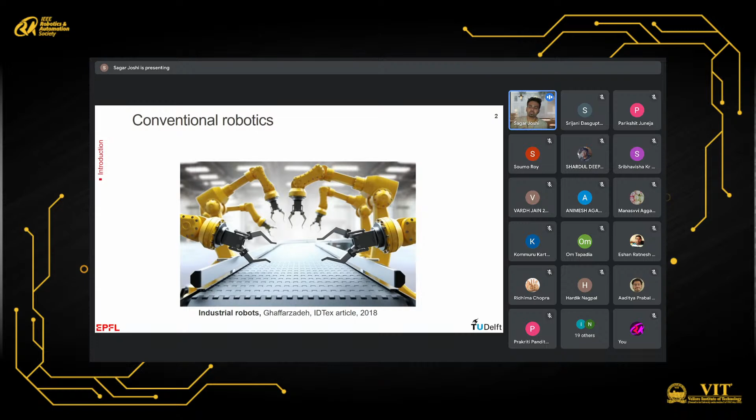So just a brief introduction. Wearable robots are robots that you can wear. They are directly attached on the body to assist or augment the function of the body. But why do we need these kinds of robots? You can have workers in industries who have to work a lot with manual material labor, like lifting things, lifting tools and operating tools and so on. For those people, you can have devices that you can wear, which can take off some of the load of the muscles of the body.

Similarly, for people who have lost some of their physical abilities, you could use these to restore some of the functions and help them in activities of daily living, which is ADL. You could also use these kinds of robots for sports training. Some of you might be aware of resistance training, where you try to put more weights on yourself while doing a particular activity. Or you could just be curious about how the body works, and see what happens to the movement and the human motor control if we apply external forces on the body.

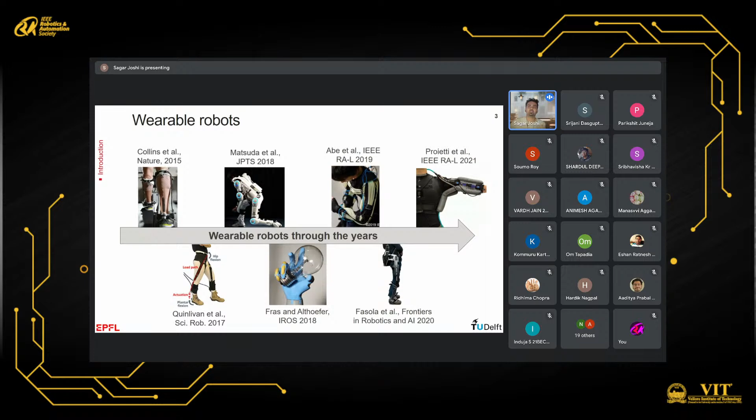So now, over the years, there have been several different kinds of robots that have been built that have been placed on different parts of the body to assist different parts. They can be briefly categorized into two main categories.

One is known as rigid exoskeletons, or exoskeletons, where exo means external and skeleton means a skeleton. The main idea is that these consist of a traditional robotic body with a rigid structure, which has rigid links connected at well-defined joints. The advantage of these kinds of devices is that we already know a lot about how to build these systems, how to operate them, how to model them and so on.

The problem, however, lies in the fact that the joints of the body are not perfectly rotational joints. If you look at the motion of, let's say, the ankle or the knee or even the wrist, the elbow, and so on, it doesn't always move perfectly across one single axis of rotation. It's always accompanied by some kind of translation and rotation at the same time. Plus, you have motion of the skin, and so on.

And so there is some kind of incompatibility between the motion of the robot and the motion of the human. This leads to additional forces that act on the body, and that can cause some kind of discomfort or even pain. Secondly, since these robots require a rigid frame, they're usually large, heavy, and bulky, and also, of course, costly.

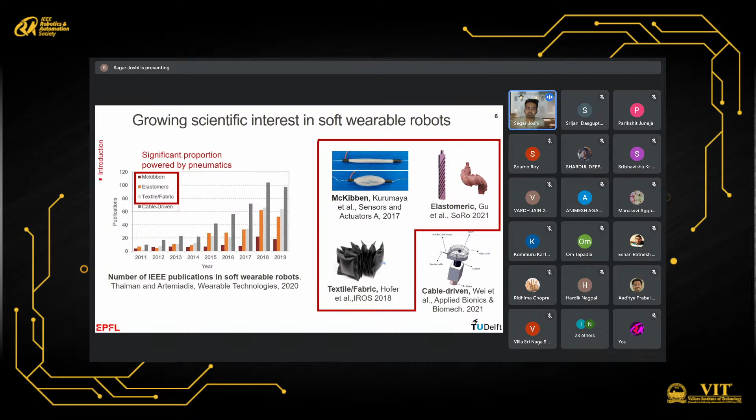So just to give a brief idea of what pneumatically powered soft robots mean, it's systems like this. The general idea is that these robots are kind of hollow structures with some kind of mechanical intelligence built into their design. So when you inflate them, they inflate in certain specific directions and certain specific ways to create some kind of motion, and that can be pre-programmed into the design of the device.

Just to give a brief summary, pneumatic supply systems consist of a source which generates the pressurized gas. They consist of valves that control how the pressurized gas is sent to the actuators, or how the actuators can be inflated or deflated and so on. And then the pneumatic lines which connect the different components.

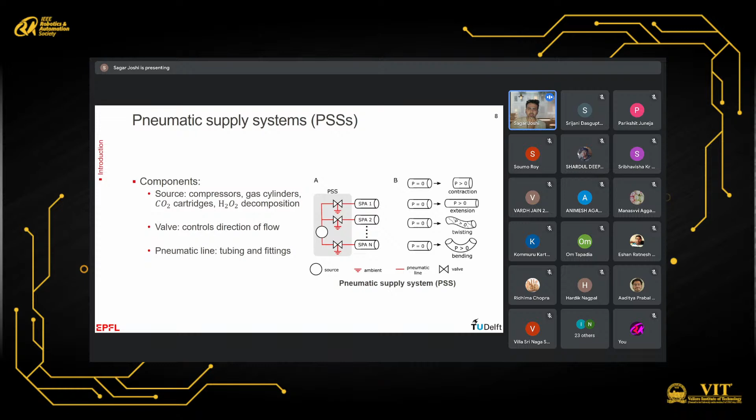Then because air by itself is compressible, you have some kind of inherent compliance. So it's not like a rigid robot which will move to an angle and then be very rigid at that point. Because of the compressibility of the air, you can still move the actuator and it won't force the person to stay at a specific position.

Additionally, since these are by nature expanding type actuators, the forces that they apply on the body are generally normal to the skin. Now, this is a very commonly observed challenge in wearable robots in general, that the forces that are applied on the skin, if they act shear to the skin, like if they act tangential to the skin, it causes a lot of discomfort. Whereas if it acts normal to the skin, comparatively, that is much more bearable. So, by nature of soft pneumatic actuators, these produce normal type forces on the body.

The next step that we have to think is that, okay, we have these soft actuators which are good for several reasons. We can build wearable robots with them, but that's not the only thing. There's a lot of things that we have to think through in between. We need to think about how the soft actuators will behave. So what will be their dynamic performance? How will they move? How will the different forces be applied? As well as the core supporting systems, mainly the power, sensing, and control.

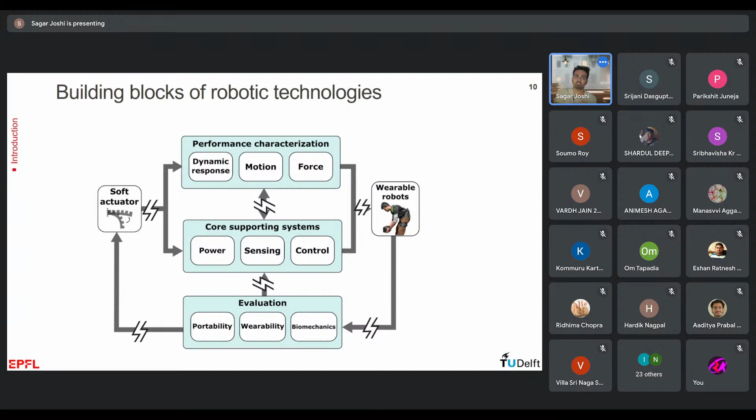When I began my PhD, there were significant research gaps in all of them. So the objective of my PhD was to try to understand the link between these different blocks, and develop a more core understanding of how soft actuators work and how they can be used for wearable robots. So among that, today I will talk about modeling the dynamic behavior of soft pneumatic actuators, and then how soft wearable robots affect the user.

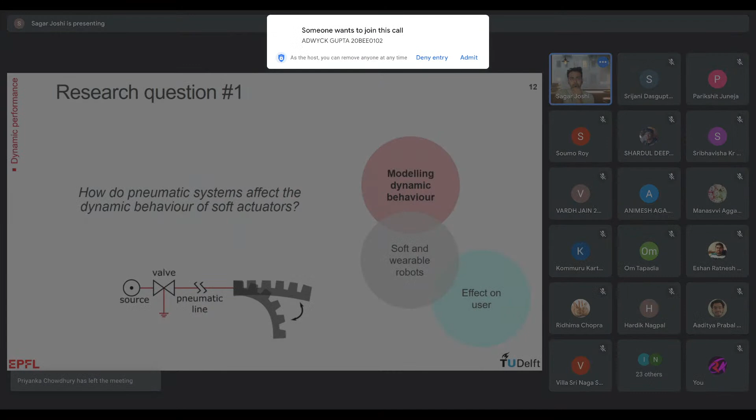So generally, when we are thinking about a research problem, you have to come up with a research question. So the first research question for the first problem is, how do pneumatic systems affect the dynamic behavior of soft actuators? So, like I had mentioned before, pneumatic supply systems consist of source, valve, pneumatic lines. And the dynamic response of an actuator is governed by these three factors.

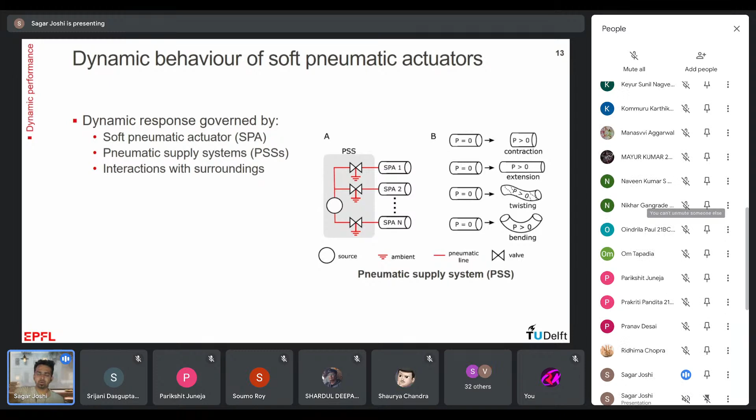Now, just to clarify this a bit more, let's say you're wearing an assistive glove and you want to reach out and pick up a glass on the table. You need to move your hand there, and then you need to power the actuator, and then the actuator needs to close the grasp within a certain amount of time. You can't have it moving very slowly for, let's say, 5 or 10 seconds. So the idea here is that generally the requirements of speed are specified for a given application. And so you need to somehow control your system so as to meet that speed.

But previous studies that worked with soft pneumatic actuators in general did not know what is the link between the pneumatic system that you have and the kind of dynamic performance that you get. Dynamic means how fast you can move the actuators. So to address this, during my PhD, I worked on a generalized model for the pneumatic supply system, in which I tried to model these different components of a source, the valve, the pneumatic line, reservoirs, and so on.

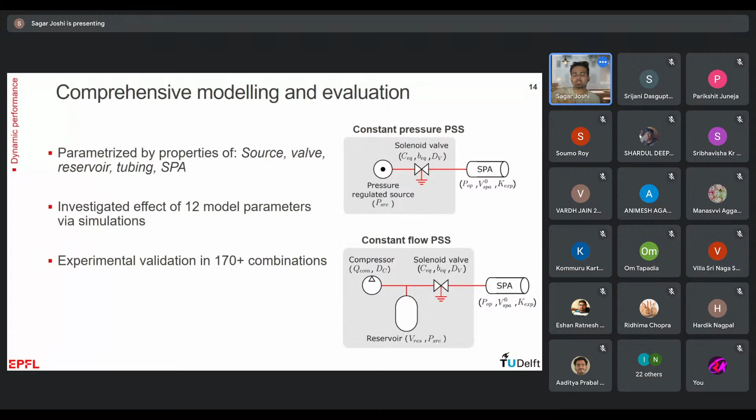At the end, the model had over 12 different parameters, and I tried to investigate how these 12 parameters affect the dynamic response. And then after simulations, I tested my simulation results experimentally using over 170 different combinations of different parameter values. So just to say as an example, actually the next slide would be helpful.

All right, so here you have a soft bending type actuator, and in the four figures you see that it is moving at different speeds. It's moving at different speeds because it's being powered by different source pressures. Now, the important thing to note here is that the actuator is always powered from 0 to 50 kilopascals.

So even though the source pressure here is almost 200 kilopascals, here the source pressure is 400 kilopascals. If you power the actuator at this value, the actuator will burst because it can't take more than say 60 or 70. So you have to make sure to power it so that the actuator pressure goes from 0 to 50 and then switch it off right away.

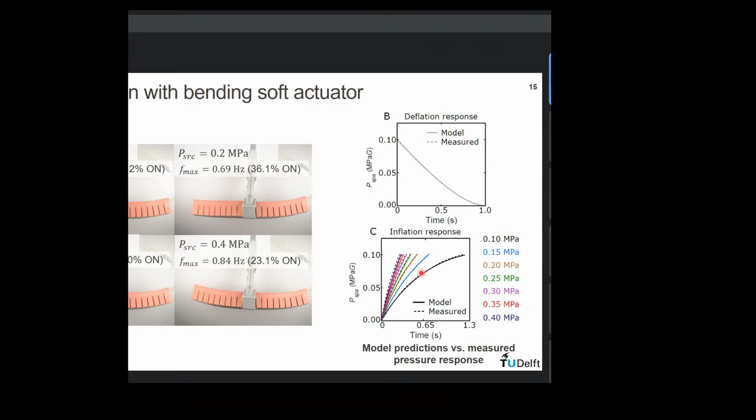But in all these four cases, the actuator is being powered at the same pressure level, but you see different speeds because the source pressure is at a much higher value in this one as compared to this one. And the two figures on the right, you can see the comparison between the prediction from the model and the actual measured data. It was pressurized from 0 to 100 kilopascals. Sorry, my bad. Anyway, so from here the dotted line was the measured, and the continuous line was from the model, and you can see that the model matches experimental results really well.

So what does this mean? It means that you can use this model to predict how the actuator will behave, how fast it will move, in what pattern it will move, based on my model and based on the parameters. So now you kind of have a link between pneumatic system and soft actuator performance. What you can do now is go in the inverse way and then use this relationship to optimize pneumatic systems.

So previously, what used to happen is that to design pneumatic systems, people used to just select some compressor, select some valve, some reservoir value, or some source pressure, and so on. And so it was very heuristic. It's like you do it from experience, or you do it by trying several times, and then you somewhat find something that works for you. But it was not really optimized for anything.

Furthermore, if you change the actuator, if you change your valve, or if you change any other component, you require to retune the whole model, or you need to retune some other components to make sure that you get the kind of performance that you need. But now, by using my model and the simulations, you can optimize the pneumatic system to meet exactly the kind of requirements that you specify. And this can be done in terms of dynamic performance, of course, but also in terms of the portability of the system. So how much air and energy is consumed, or how much air or energy is available to you.

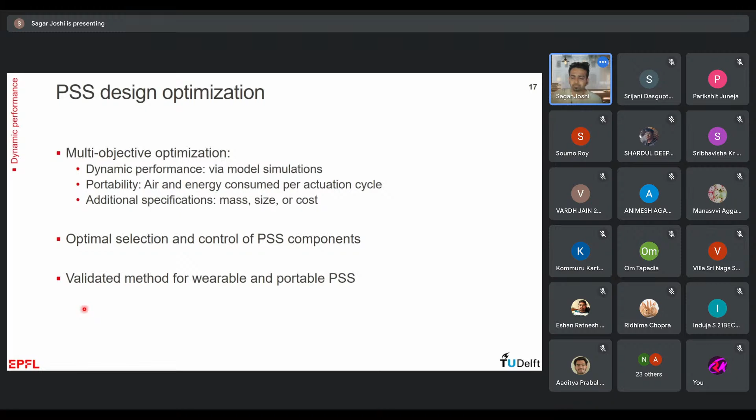So using this, I validated this method by building a kind of a wearable and portable pneumatic supply system with minimum weight of components. And the requirement there was to meet the performance requirements and the predicted pressure response. So I specified that my actuator needs to deflate within 0.75 seconds and needs to inflate within 0.4 seconds. And the objective was to come up with these set of different components like your compressor, valve and so on, which would allow my actuator to meet these specifications.

So to summarize this part, I worked on a model to quantify the relationship between soft pneumatic actuators and pneumatic supply systems. And then using this model, it is now possible to do design optimization of pneumatic supply systems. There's several further directions which can be taken. For example, there were a lot of assumptions in the study, like the process is isothermal, or the actuator expands linearly with the pressure and so on. But yeah, these could be explored in future directions.

Now, the second and also very important aspect of wearable robots is we need to evaluate how the wearable robots actually affect the user. Now, why do we need to study this? Well, in case of rigid exoskeletons, they have a rigid frame, and so a significant amount of forces that are generated by these robots are already taken up by the frame itself, and so they can be somewhat safe, let's say. In case of soft wearable robots, they are inherently safe because they are compliant and conformable.

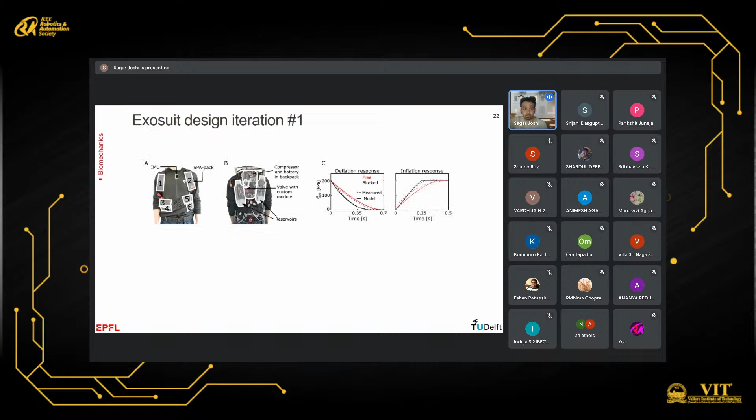So to design the soft actuator, the main idea was to use a bending type soft actuator and place it between the wearer and a kind of fabric attachment that goes over the top of the actuator. So when the actuator expands, it generates tension in these fabric straps, and then that will push the person back to the upright position, or depending on what you need.

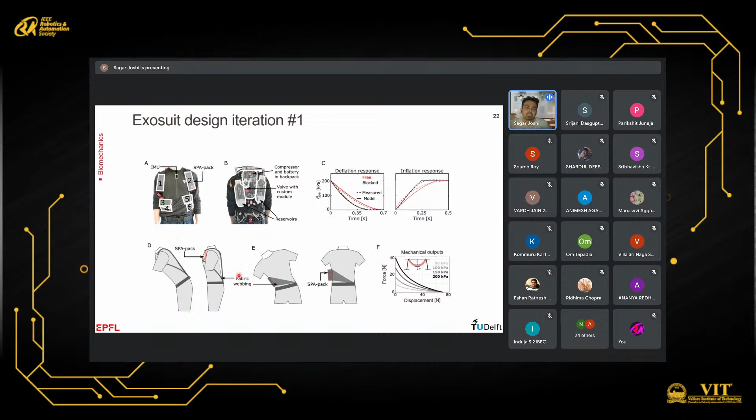So this was the first design iteration in which the exosuit could provide assistance in forward bending and lateral bending. But the forces that I got from this were comparatively smaller. So I used the same kind of actuation mechanism, but then developed the final version of my exosuit, in which again there's these three soft pneumatic actuators which bulge out when you pressurize them. Let me try to play this video.

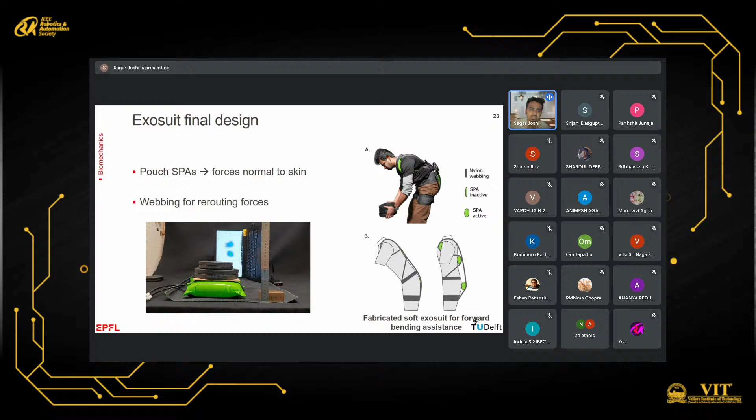Is it on? Yeah. So when you pressurize it, it just bulges out. And as it bulges out, it generates tension in these different fabric sections. And because of the tension generated, there is an overall moment that acts on the torso, which helps to push the person back into upright position.

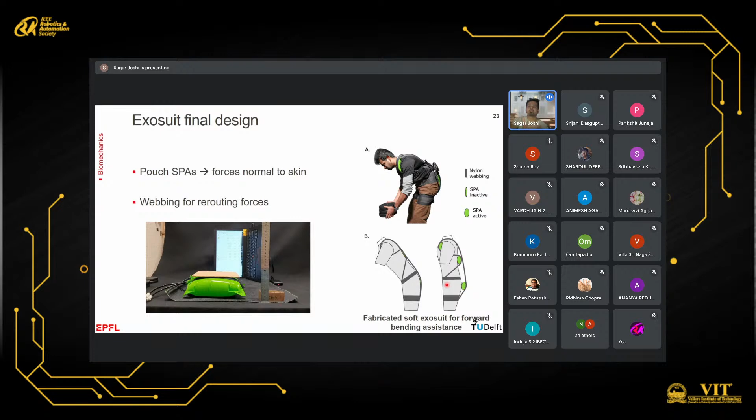So the idea of this one was that you have one actuator on the back which generates an extending motion on the spine. Extending means it makes the spine upright from a forward bent posture. One actuator on the waist which applies a moment on the hip joint over here so that it tries to make the hip also vertically upright as opposed to when it is bent forward.

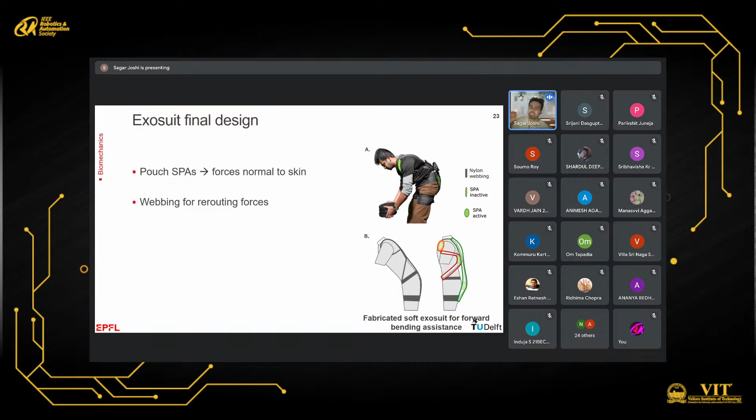And then one actuator at the chest which acts as a tensioner pulley to generate more tension in these other two sections. So now I built the device. Now we need to evaluate how it affects the user.

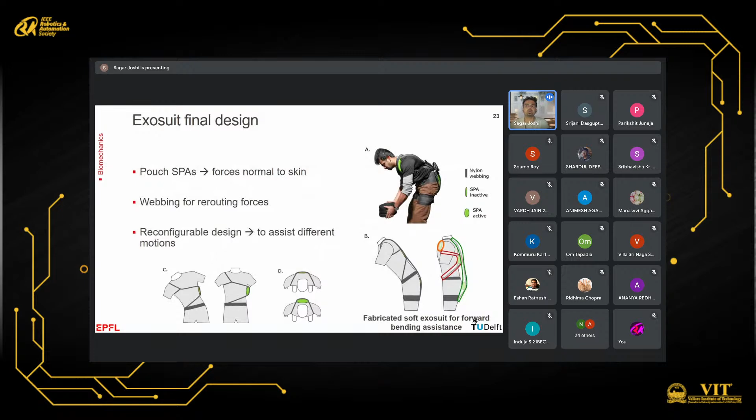So to do that, first I measured how much forces are being applied by the exosuit, by placing pressure sensing arrays between the actuator and the user. And you can see here that significantly high forces are being applied, almost in the range of 500 newtons. These are very high forces. This also suggests that we need to study how these would affect the user, because if not studied properly, these could cause some kind of injury to the user.

So how do we evaluate this? We use an approach called musculoskeletal modeling. So from the word, you can see that musculo means muscles, skeletal means the skeleton. So musculoskeletal modeling and analysis is a method in which you model the human body as a bunch of rigid bodies for different bones and special types of actuators that represent the muscles.

And you run that in a physics engine, and you can apply external forces on the system, and then you can try to find out how it affects the muscle forces or how it affects the loading on the joints of the body.

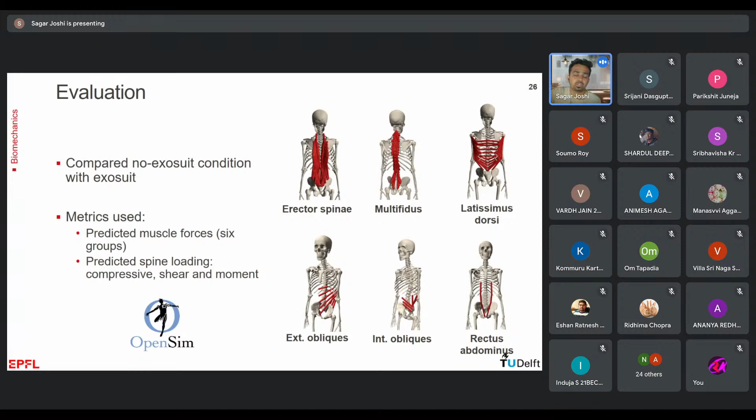So I looked at 6 different muscle groups which are relevant for the torso, and I calculated what would be the predicted muscle forces and the loading on the spine in compressive, shear, and joint moment. So generally, to summarize this quickly, by using the exosuit, you would have 60% reduction in one of the main extensors of the back, like the main muscle of the back. There would be up to 60% reduction. Similarly, there would be reduction in the compressive forces generated in the spine.

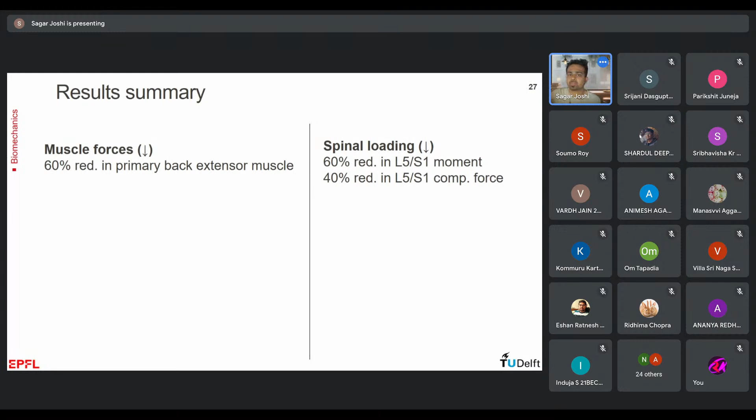At the same time, however, there are other effects, mainly that there's a slight increase in the abdominal muscles. So now you can think of the back muscles and the abdominal muscles as acting opposite to each other. When you have an exosuit that is pushing your body behind, the muscles of the abdomen have to kind of counteract against that so that it doesn't push you too much. That's why you see the rise in the abdominal muscles. And also you see there is some amount of increase in the deeper muscles of the spine.

Now this is particularly important because usually you can measure some of the muscle activity of the body by placing these kind of EMG sensors on the skin, but they can only measure the activity of the superficial muscles, the muscles which are very close to the skin. But we have different layers of muscles, and the deeper layers of muscles, it's very difficult to measure the muscle activity of those muscles using these surface EMG sensors. And so essentially, till now, people did not know what is actually happening to the muscles that you have way deep, close to the spine.

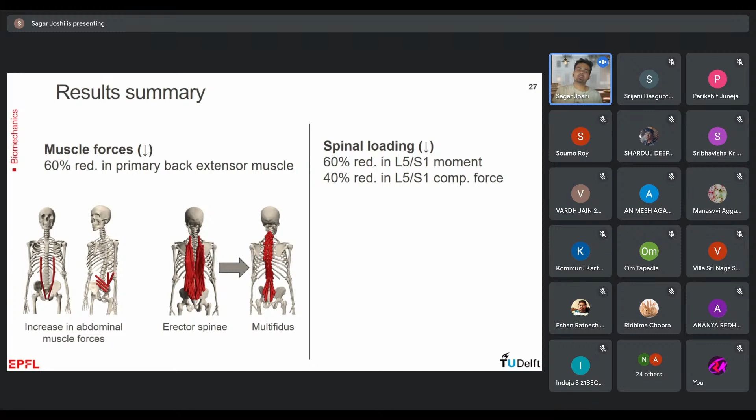From the simulations that I ran, I found that there's some amount of a shift in the loading that occurs from the outside muscles to the internal muscles. So that was kind of like a new finding. With respect to the shear forces that act on the spine, overall there's a reduction in the shear forces, which is great. But with respect to the compressive forces, if you look at the whole spine, you have different vertebrae. So I saw that there's some kind of shift of loading, that by the use of the exosuit, some of the loading on the lower back gets transferred to the upper back.

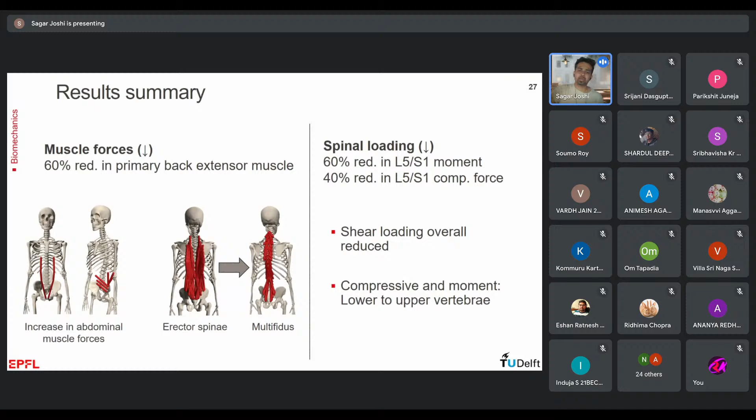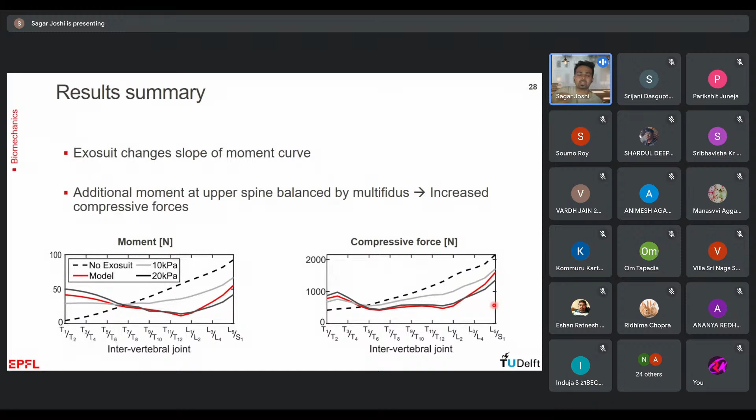So to summarize this section, during my PhD, I came up with two different designs of exosuits, and then I tried to model the interaction forces between the exosuit and the human, and then try to analyze how that would affect the muscle forces and so on.

Now, there's several other future directions that are possible, like lifting in dynamic conditions. What I had checked was mostly static forward bending positions, but you can do the same analysis also in a dynamic lifting task where someone is actually lifting something, let's say lifting from the ground and putting it on a table.

When you have dynamic motions like this, you have additional inertial forces and additional forces in general. So it would be very interesting to check how dynamic lifting would be affected by exosuits. And of course, then it would be useful to validate the kind of results that we get by using EMG, which is again like measurement of the muscle activity of the muscles.

The last part, very short part, is now okay. Now we know how we can optimize the pneumatic system. Now we know how we can model soft wearable robots. Now, can we optimize the design and control of wearable soft robots? So basically, that's exactly what I'm trying to do during my postdoc. I say confidential because things are not published yet and we are trying for a patent and so on.

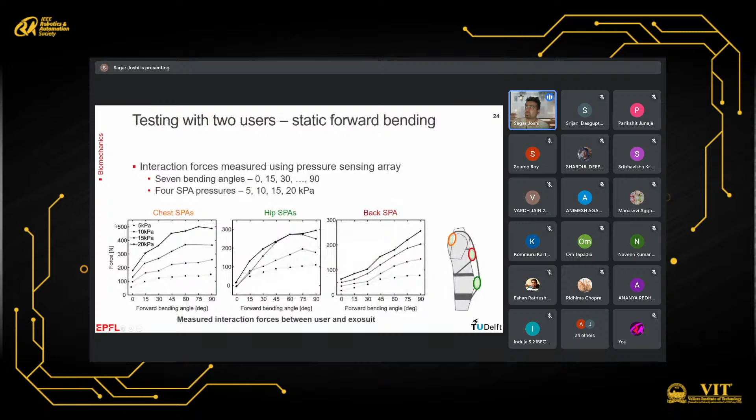Let's take the example of this device. In this case, you would just power your actuators to go to a certain pressure, and then as you bend forward, the actuators will kind of get squished, and they will apply some kind of force depending on how much they are squished. The more forward you bend, the more they will be squished, so you automatically get some kind of a proportional force with these actuators. If you have cable driven systems, you can do the same.

You can control the amount of torque that you apply, or control the amount of force that you can apply just by using some kind of force sensing, or you can measure the current that is required to generate the force, and you can control that. So it's kind of, yeah, pretty straightforward, I think. Does that answer your question?

Yes, sir. Yeah. Yes. So I mean, other things you can do is you can have sensors placed on the body, which kind of try to figure out what kind of activity the person is doing, and then based on that activity you can have a control system that will control how much forces are to be applied. So it will guess if the person is bending forward to lift something, or if the person is putting his hand up to maybe lift a tool above his head and so on.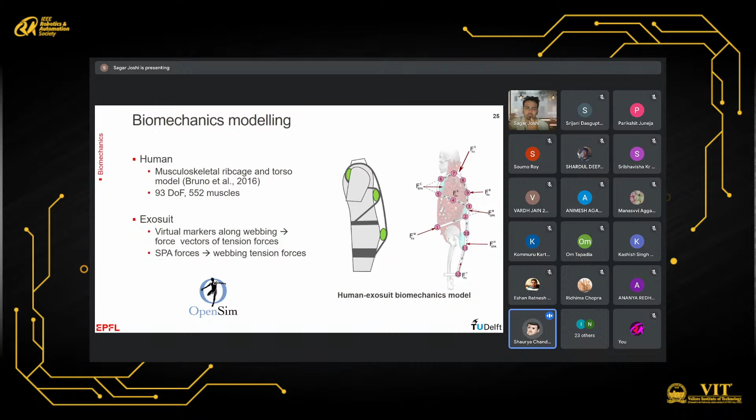I'm the technical head of IEEE-RAS, and truly a great session. I wanted to get into the details of the electrical implementation inside these actuators, any soft actuators. Do we have actual mechanical actuators pulling in the different forces, or fluid-based solutions? Basically, I wanted to know how we are manipulating that pressure that you talked about in the soft robotics part. Oh, okay. Let me go way behind.

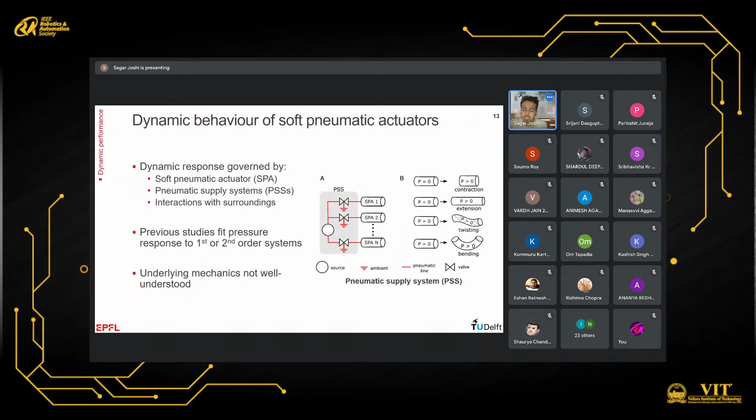Okay, so for soft robots, you have generally three kinds of methods by which you can generate force. One is through pneumatics, which is the kind of actuators that I work with mostly. There's a hollow cavity which, when you pressurize it, expands and moves in some specific directions, and generates some kind of motion and force. The other type is cable-driven systems, in which you generally have a soft structure, and you just pull a cable with a motor, and then the soft structure will move.

And the third is electroactive polymers or dielectric elastomers, in which there's a soft silicone body with some kind of capacitors inside, and when you power these capacitors, because of the voltage difference, the body of the device deforms, by which you can generate some kind of motion.

Again, for the three mechanisms, you need different supporting systems. In the case of pneumatic actuators, you generally need a compressor to generate the pressurized air. You need valves, which can direct the air to different actuators. And then you need pneumatic lines, which you can see in this figure. Does that answer your question, or do you need something more? Yep, that answers my question.

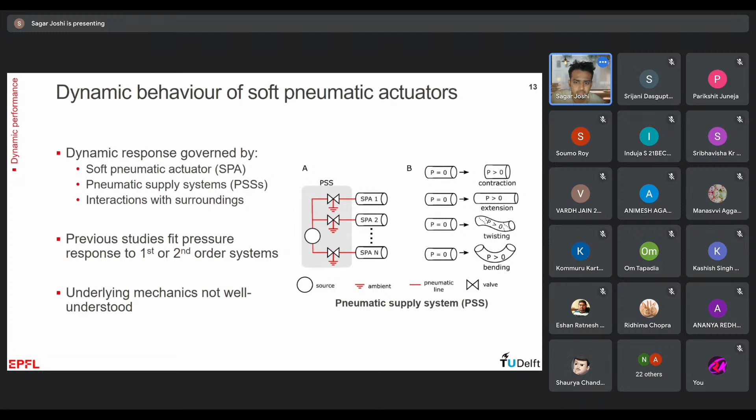Perfect. Also, I wanted to ask if you can give us a short demo of the OpenSim software that you told us about. We really want to get into development of this software. Actually, we were planning on a mixed reality glass. For that, if you can give us some idea of how the OpenSim software looks. Okay, let me share my screen. Can you see this?

So, OpenSim is this biomechanics-based software. You can load different kinds of models in it. Let's see. It's loading now. Sir, is OpenSim free software? Yeah, it's a completely open source software. Okay, so now you can see this.

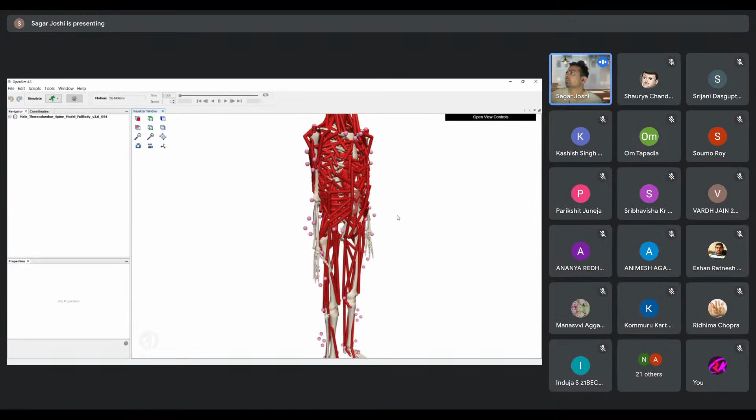You can see this thing on the left, where you have ground, bodies, joints, forces, markers, and so on. In the bodies, you would have different bones. Let me just hide the muscles first. So in the bodies, you have different bones, like the pelvis, sacrum, different sections. You have a section for the abdomen, for the five lumbar vertebrae. You have different ribs, radius, ulna, so your hands and so on. I think this is a large model, so it's taking a bit of time to hide the muscles. There's too many muscles.

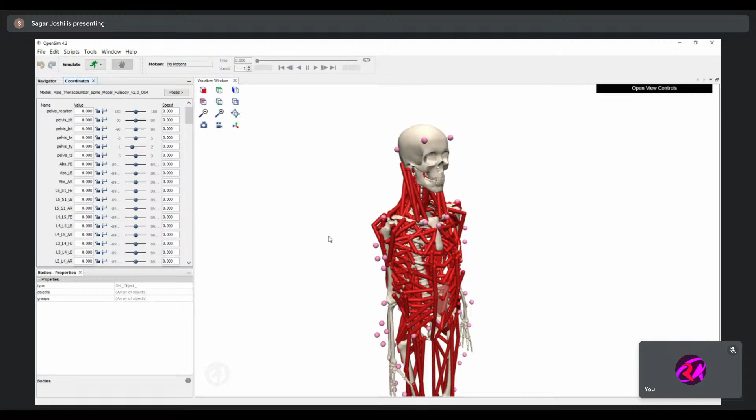But anyway, the idea is that this is what we call a physics engine, which means it has a ground, it has gravity, and it helps to model multi-body rigid body systems. Now you see a skeleton, but you can also model something like a slider crank mechanism or a four-bar mechanism and so on. The different bones that you see correspond to different bodies. Each of them is connected at joints. So this is, for example, the shoulder joint and so on.

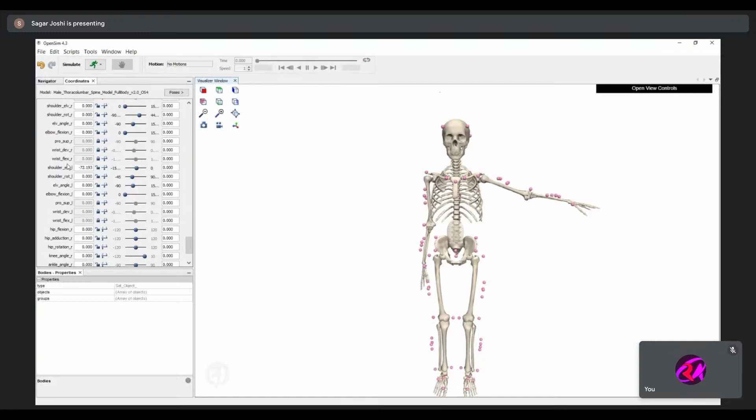And then here you have different coordinates with which you can change things. So let me just move the arm a little bit. So you can see that now the arm can move by controlling this dial. So what you generally do with this is that you load a kind of model, and then you load a specific type of file known as the kinematics file, which creates like a trajectory for each of these degrees of freedom. And so when you load that into it, the skeleton will move in a particular pattern, depending on what kind of motion you give it.

And then it has lots of muscles. So let me just have some muscles there. Yeah. So these are the muscles of the chest, which are the pectoral muscles. And as you move the arm, you can see that the muscles are also moving along with that. So they are kind of like attached to different bodies and so on. And then you could load different motion files in this and try to use the built-in tools that this has to calculate what will be the muscle forces required in order to move in this way. So you would find all of that in this tools section.

So I would say that if you guys are interested, then just search for OpenSim, musculoskeletal, OpenSim and biomechanics, and you would get a lot of resources. This is fully free. You can download it and start working on it like today. And you will also find lots of nice tutorials on YouTube.

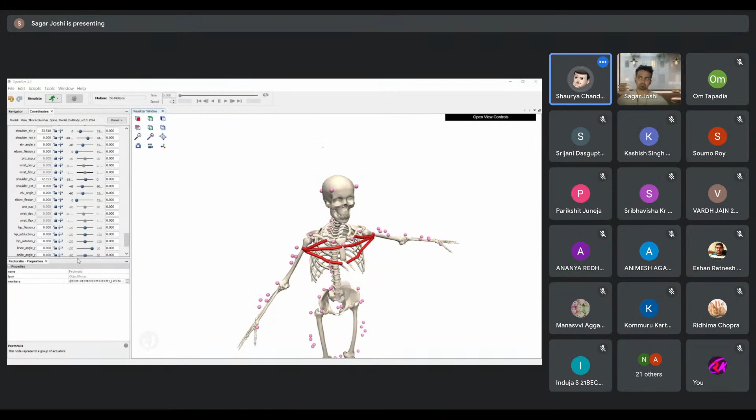Yeah, I was googling it side by side. Thank you so much. It is very similar to the ANSYS simulation environment. It would be easier for us to adapt to the software. You guys are using something else? No, I was just saying it's very similar to the ANSYS simulation environment, so it would be easier for the mechanical stuff. So it also has controls in the joint space.

Okay. Yeah, I mean, ANSYS is much more, let's say, diverse in the kind of things that it can do, because it's used for finite element analysis and so on. This doesn't have finite element analysis exactly. Yeah, I was saying it will be easier for us to adapt to this OpenSim as well. It's very similar. Possibly, yeah. It's generally decently easy to use for basic things. If you want to do a lot more fancier things, then you require to spend some amount of time. Right. Thank you so much, Sagar.

One more question. Exoskeletons and exosuits can be used for military load carriage, I guess. So can we come up with a compatible design and material so that these can have applications in military as well? That's already happening, especially in the US. So the main difference between different applications is mainly the amount of forces that you apply. If you're assisting someone with some kind of physical disability, then usually you just need to apply some amount of force so that the person can do this particular task. And the kind of application is also usually different.